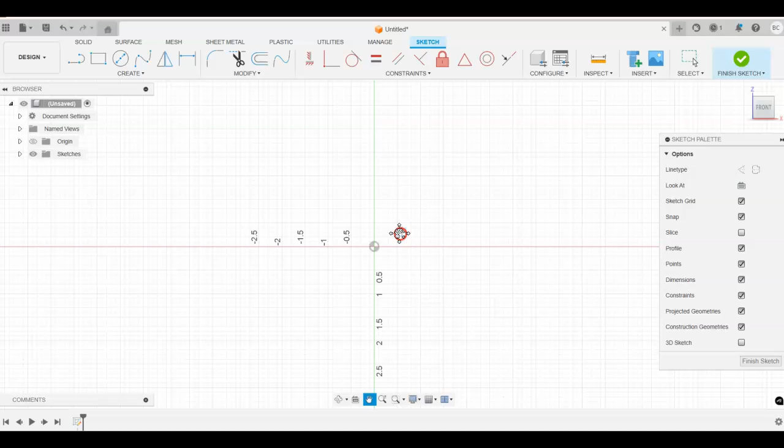I'm going to start by sketching on the front viewing plane, using the line tool again, going off of the origin point. I'm going to move this over a little bit. And remember from before, we can actually type in the dimensions.

Notice this is giving us 200 or 100 for our dimensions, so we've got to pay attention. What are the sizes here? Well, this is actually in millimeters. So let's come up to our document settings and change our units from inches into millimeters. We're going to make this millimeters and click OK.

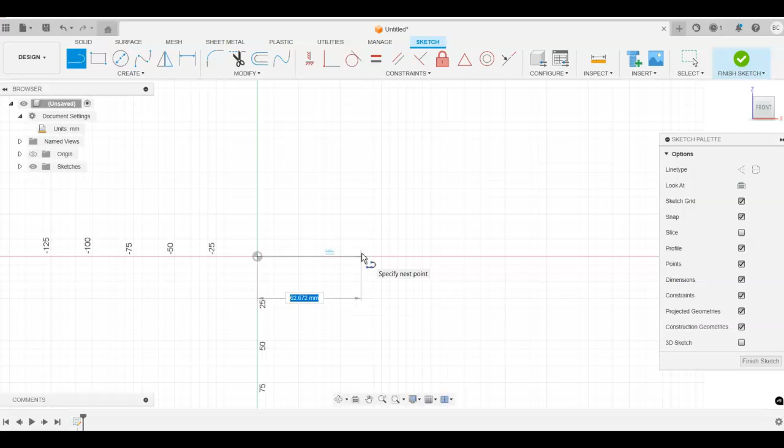Now we can draw this and make sure we're using the right sizes and dimensions. We're going to start on this line, which is going to be 200 millimeters. I can bring this at an angle, or make sure it auto snaps at 0 degrees. So I'm going to have it auto snap to 0, left click.

I want to keep the line going this way. It's going to be 45 here. Notice I can move this around and it auto snaps at the perpendicular constraint. I'm going to let it auto snap at the perpendicular constraint, left click, come this way now.

I've got to do a little math here. In my front view, I see the overall dimension at 200, and I subtract the 160 from it, so I know this is going to be 40 millimeters here. Again, let it auto snap for that perpendicular constraint, left click to place it.

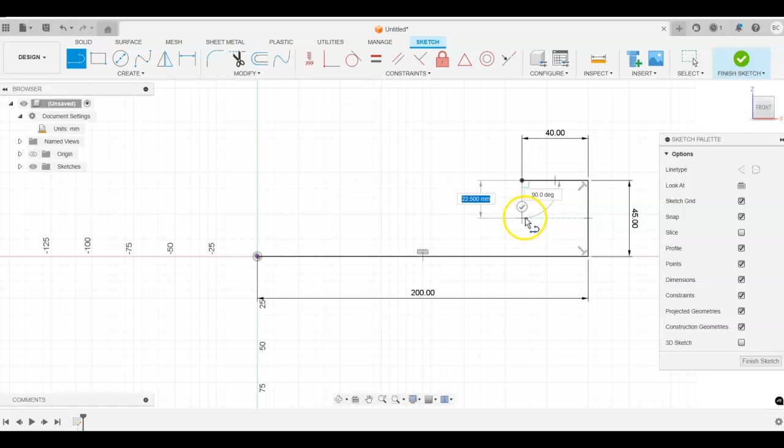I'm going down here now. Notice as I start to create geometry, I do get some other auto snaps. This is an auto snap at that midpoint right there, so we get some different auto snaps going on as well.

I'm going to start with my line length. In this case, I've got to work backwards again. I see the 45 dimension, and I subtract 20 from that, so this line is going to be 25 millimeters. We're going to auto snap again at the 90-degree point, so left click to place it, and now I'm coming over here.

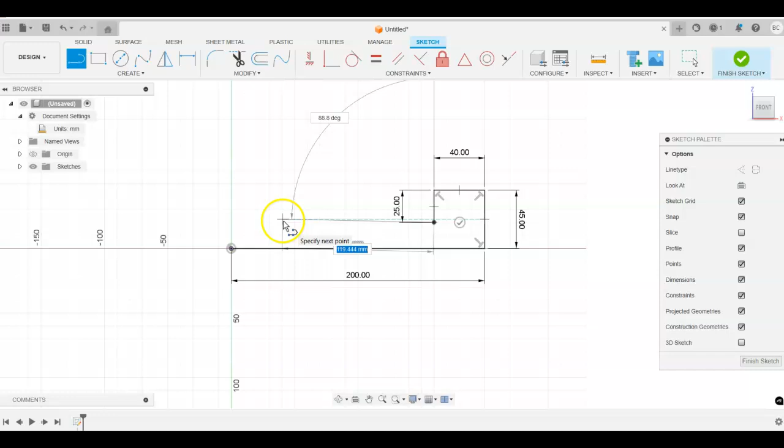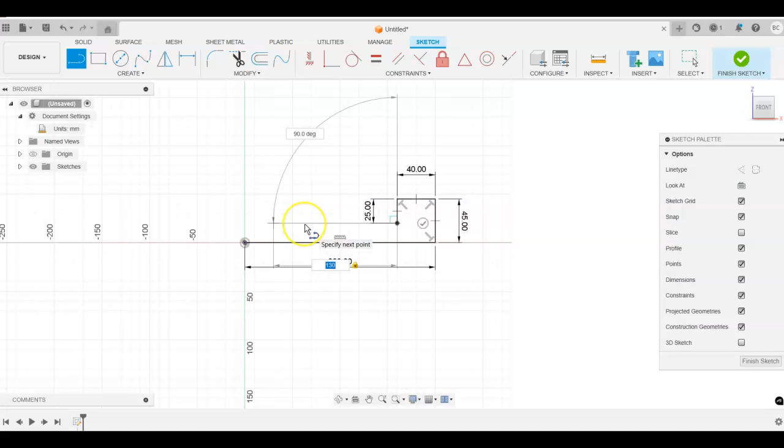Once again, I've got to do some math to figure out the length of that line. Looking at my dimensions on the orthographic view, it's 160 minus 30 millimeters, so this line is going to be 130 millimeters. Again, make sure that auto snaps to basically make sure that's parallel and perpendicular. Left click to place the line.

I'm going back up now here, and we see, all right, well now I'm at 80 millimeters, which is the overall height that I see in the right side view. And we know this was 20 millimeters up, so 80 minus 20 is going to make this 60 millimeters.

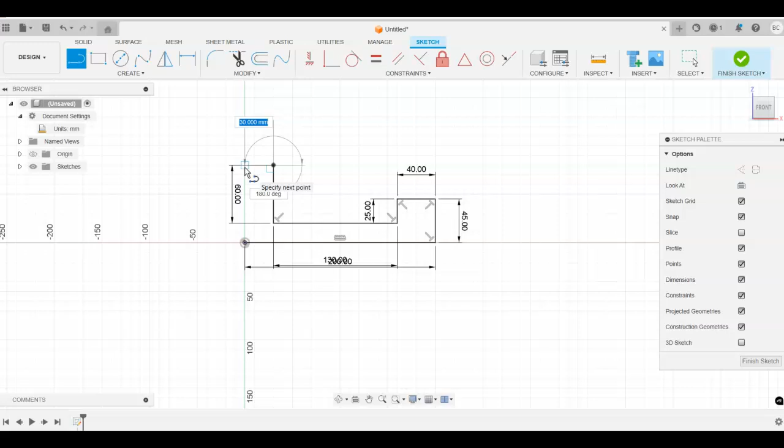Notice I hit the enter key there, and that took me out of the line drawing tool. Not a big deal, let's go back now to the line drawing tool. I can come in here. Notice that automatically gives us our 30 millimeters - that's a clue that we did our math correct. If that wasn't automatically coming in at 30 millimeters, we'd know that we did something wrong with our math.

Come back here and close this feature out. So there is the shape. I'm going to finish this sketch, and we're going to come to the home button so I can turn the isometric view here. And now I want to extrude this shape.

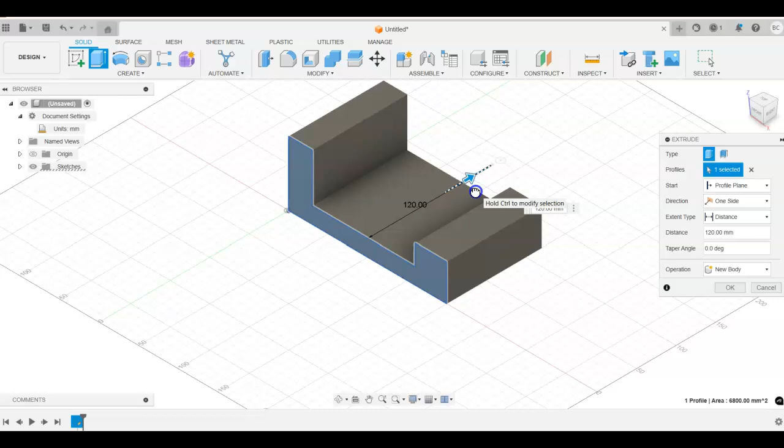We're going to extrude this back. This gets extruded 120 millimeters, so I'll hit enter to get out of the tool. So there is the basic shape for this.

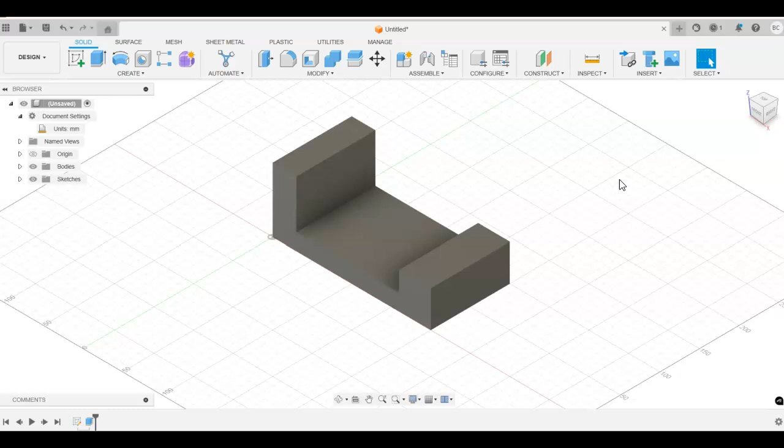So now I'm going to stop the video here, and we'll create the next video where I come in and we'll start to add the holes that need to go into this part as well.